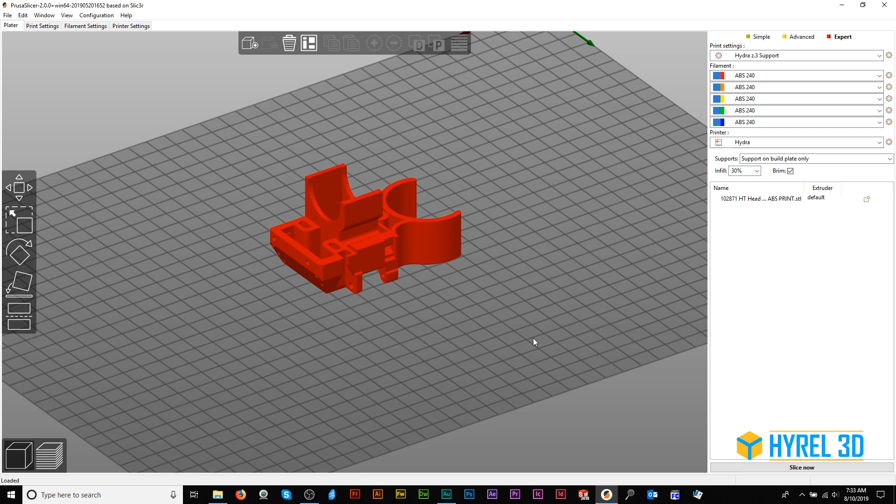Let's go to Print Settings. Let's look at Layers. For layer height, I've printed ABS anywhere from 100 microns to 300 microns. The ideal print settings for your applications are determined by a number of factors. You'll need to experiment to find the best way to print.

The same material can print differently due to geometry. Ambient temperature and humidity can affect how materials print. Moisture content in the plastic can also affect printing. Settings such as layer thickness, temperature, and print speeds will have to be dialed in.

Here we have Infill. These are settings that I've found to work well for my needs. Again, these print settings will require adjustments. Here's Support Material. If you need breakaway support material using the same head, click Generate Support Material. Breakaway support material is printed using the same material that the part is printed with.

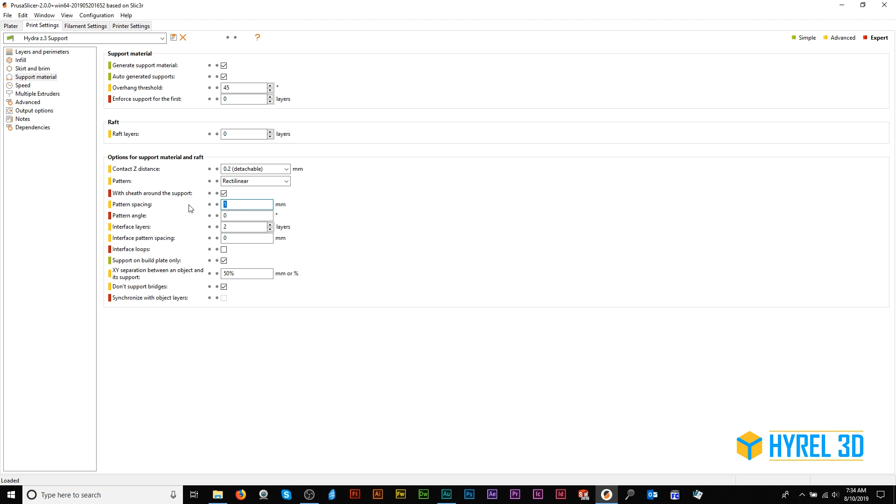You'll want a contact Z distance of around 0.2 millimeters, so you can detach the support material. I've found a pattern spacing of 1 millimeter to work well for support material. Here is Speed. Here's where you change how fast the part is printed.

Let's select Multiple Extruders. Having everything under extruders set to the default value of 1 is something that you'll want when printing the part and support material from the same head. Here's Advanced. Extrusion width is generally greater than the nozzle diameter because the extruded material is going to be a percentage larger than the nozzle.

It can be between 10 and 20% larger. It's going to depend on the head and the material being used. This is due to die swell. This is the tendency for material to expand when exiting an orifice.

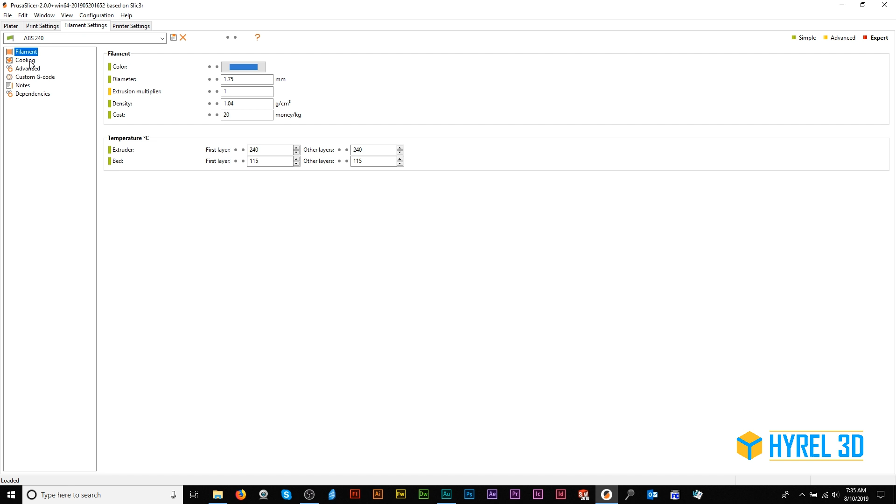Here's Filament Settings. These are typical filament and cooling settings for ABS. Now that we configured our slicer settings, we can slice our part. Now we can export the G-code.